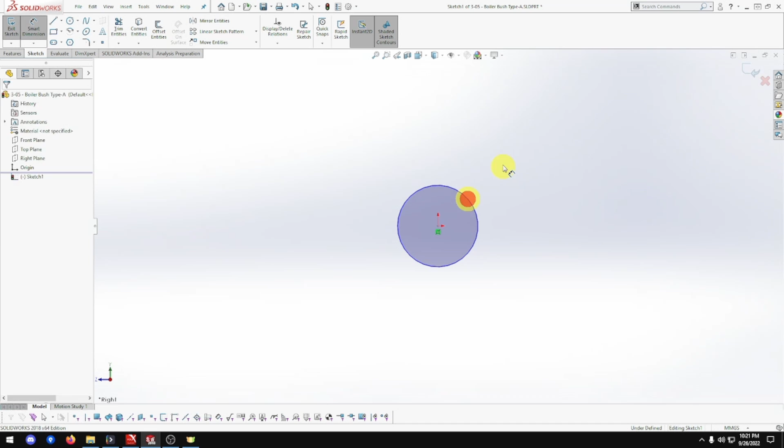So open up MMGS. Okay, open up right plane, sketch. It's going to be one circle, 16 mil. It's going to be feature extrude, that's going to be 9.5.

Done. And that looks terrible color. Done. There we go. Okay, so now this, either end, but this end looks good.

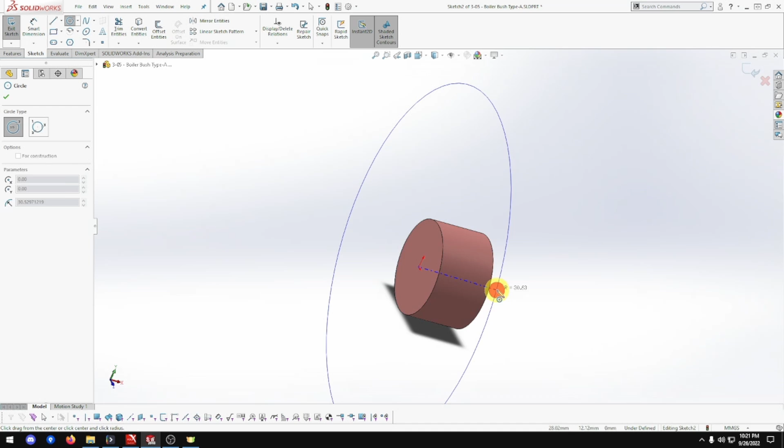Sketch, circle. Make sure it's the center point. Probably not quite that big, but that's fine. That's going to be 19. And that's going to be feature extrude, 6.5. Oh, 6.5, yeah. I suppose 9.5, yeah, it's not much difference.

Done. Beautiful. Let's just do a slight fillet on this. Don't even want 10 mil. 1 mil may be too big. No, actually 1 mil is perfect. Okay, so that one's done.

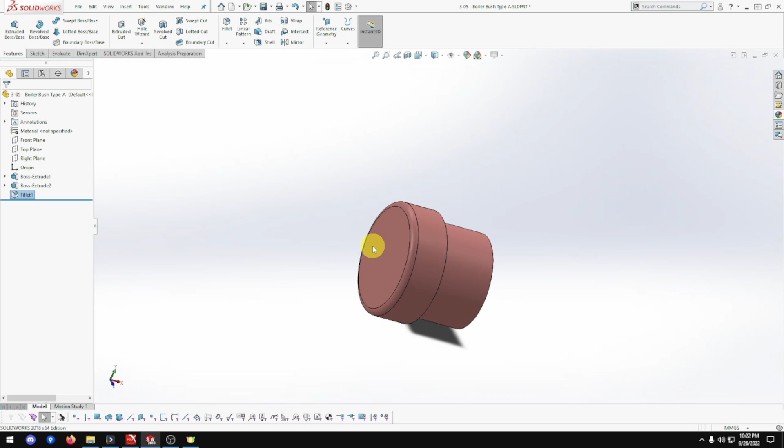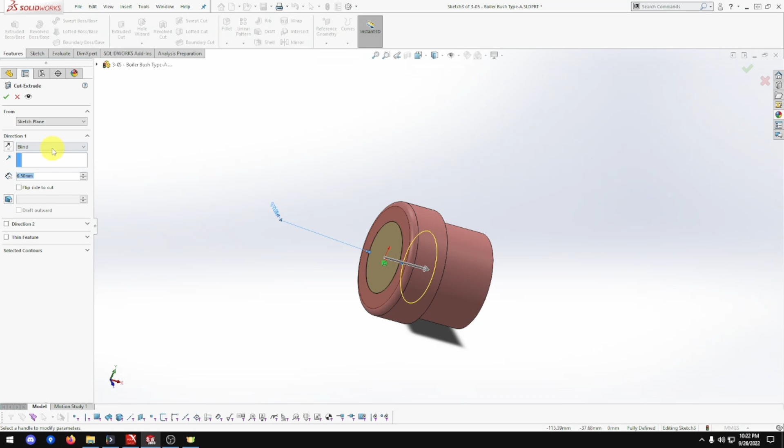That's not finished, that section's done. So we want sketch, circle. That's going to be 12 mil. This could have done either end, so, but it's going to be all the way through. So it's going to be extrude cut, through all, and okay.

That area's done. Now we want to do a, where is it? Oh, there is a thread. It's going to be M12 thread. Got that, we want M12, M12 1.5.

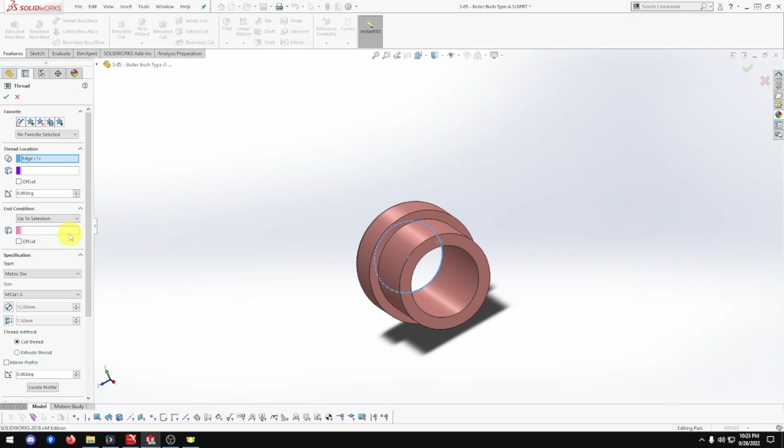So we want that point up to that point, and always, always do the wrong way. Whoa, what the heck happened there? Okay, that went definitely weird. Let's open that back up. I don't know why it's done that.

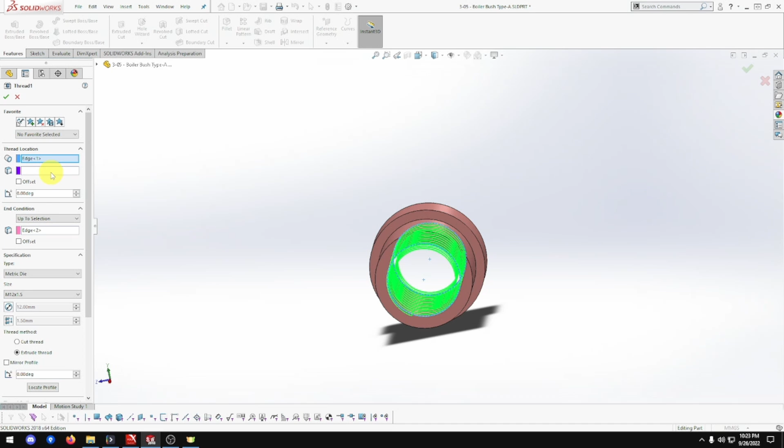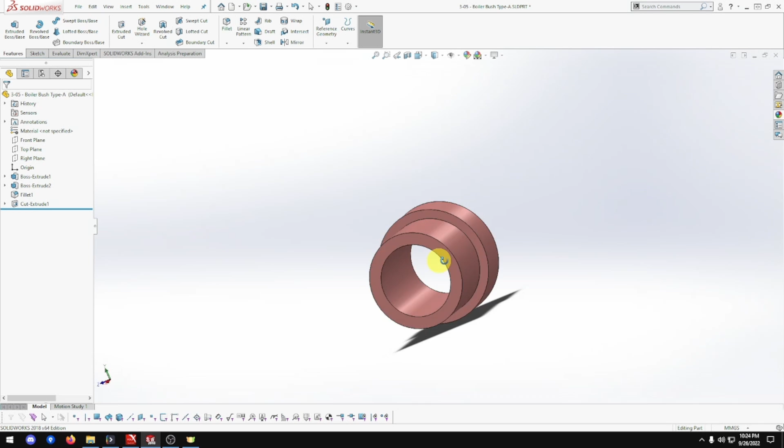Does it make any difference? Nope, it does not like that, does it? Wow. You know what, that's kind of definitely weird. So let me just delete that one. Yep, let me just leave them there. Got to be a thread, but we'll work that out later. Let's go and work out threads again. So that is that piece done.

That's part 3-05, boiler bush type A for the Clayton Undertype steam wagon.